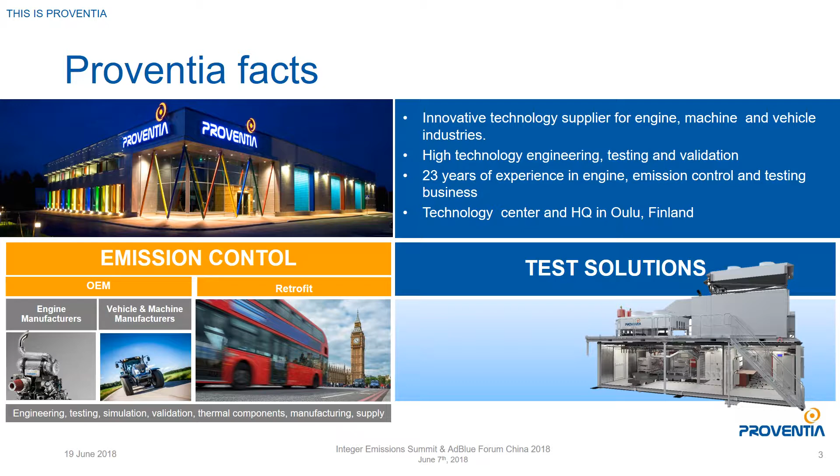Emission control as one slide could look like this. We do engineering services, we design, we develop complete systems. Sometimes we select the components, catalysts, dosing systems - everything can be selected either by us or by our OEM customers, or in combination. We make the design based on the space claim, back pressure targets, and all this stuff.

Typically, a lot of simulations are needed - CFD and FEA type simulations we do on a daily basis in-house. What we have developed and designed, we test and validate through engine testing, performance testing, aging and durability testing, and typical mechanical challenges or issues will be verified as well on shaker units, corrosion testing, or you name it. As a result, we have this tailored or tailor-made system for each application.

Having said this, of course the target is to find as universal a solution as possible to be a key part of the engine itself. That's the trend today, that it's a sole component of the engine. So whether it's a forklift, telehandler, water pump, tractor, or harvester, more and more our customers are targeting having the same kind of unit or components across all applications, if that's possible.

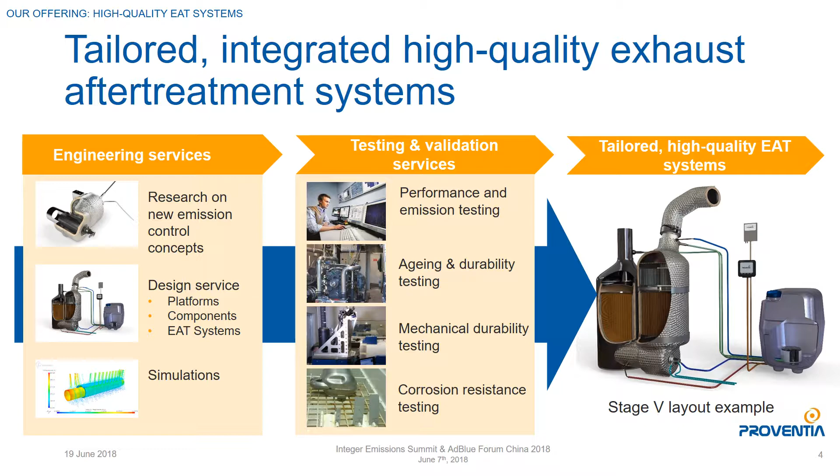For our testing, we have engine cells, 4 dynos for testing up to 470 kilowatts. What we do: the customer sends the engine to us, we make the basic concept development, catalyst screening, dosing parameter development. We do a lot of aging studies or durability studies, and we can run unmanned with our aging - 24 hours, 7 days, with remote control in our dynos, which makes us fast and cost efficient in developing.

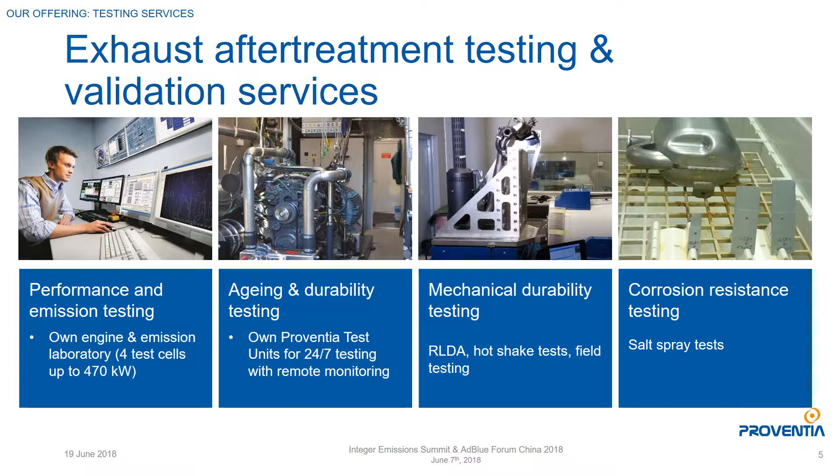For the test solutions, the picture on the right is actually from our backyard. We realized that we need more capacity because more and more projects were coming in, and we didn't have space indoor. So we developed a container-based test solution for our own purposes first.

But then our customers, or people visiting us, started to be so curious about these, and they started to ask, can you sell these? And yes, today we sell these, and it's really a business for us to develop and design test units for engines, powertrains, or electric components like batteries, for example. It's really modular and transportable - you can use it today in China, next year in Brazil. It takes only 2 containers to deliver, then 3 weeks of installation, and it works again, roughly speaking.

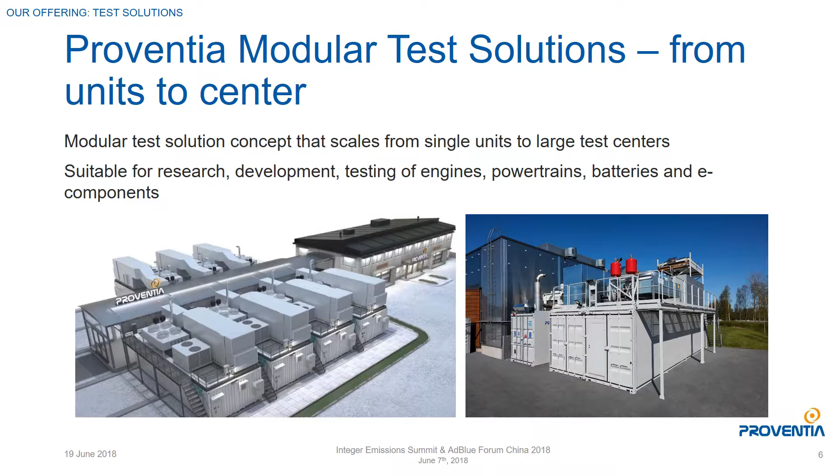Now we go for after treatments or emission control challenges and development drivers. There's more and more focus on real world conditions. We heard good examples from the PEMS challenges and telematics during the days. So what are the requirements in the future to really control that vehicles are as clean as they claim to be? Thanks to certain OEMs a couple of years ago, emission control companies are happy to develop things further because there's a lot more control to come. Real world efficiency and high demand for efficiencies are there over wide temperature areas, over different types of applications in non-road machinery.

We saw rather nice pictures by John Deere in the previous speech. What kind of applications do we really have? It can be a harvester machine. We are from North Finland, minus 40 degrees in winter time. SCR needs to work, DPF needs to be regenerated at minus 40 degrees ambient temperature. The same engine can be used in a vineyard tractor somewhere in South Italy, for example, plus 40 degrees. Same system, same engine, same catalysts, same dosing control systems and everything.

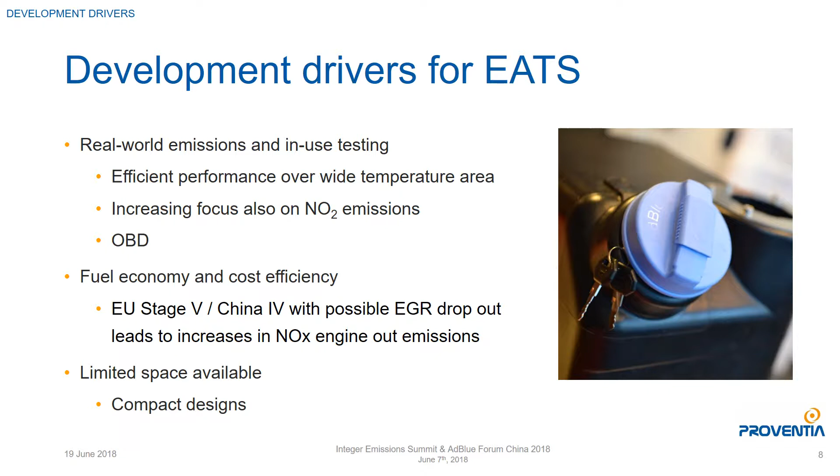Wide operation window from full load condition to low load conditions, different mass flows, different temperatures, and different NOx emissions, different dosing parameters. High NOx means a lot of dosing there to avoid ammonia slip. And you cannot get any wall wetting, so you need to take care of the design so you are not causing any kind of issues with the low temperature conditions.

High NOx reduction targets, legislation is tighter and tighter, so more urea needs to be injected because engines are still emitting NOx - we heard up to 9 grams per kilowatt hour. It's quite typical without EGR. You need to meet emission regulation with that kind of raw emissions. And whatever we dose, of course, the catalyst needs to do its work, so we need to make the design so that all the ammonia molecules will be utilized for the reactions.

And all this under the bonnet in the tractor, or very space constrained applications, which causes certain challenges on wall wetting and deposit issues. One needs to have good mixing devices, good design. As an example...

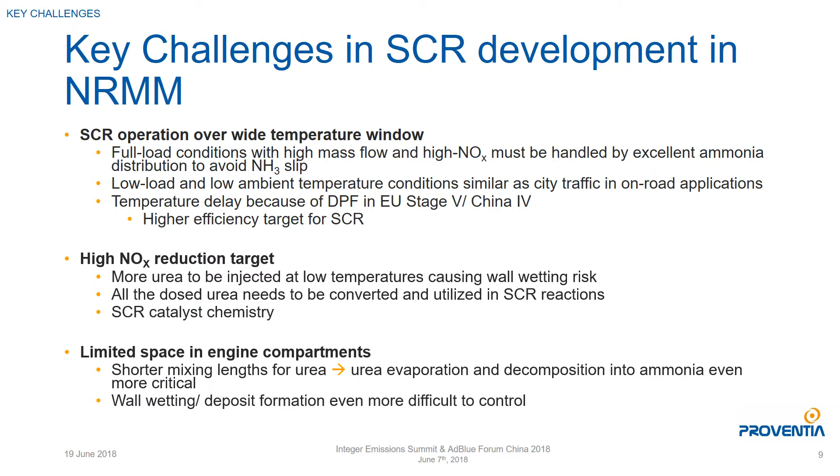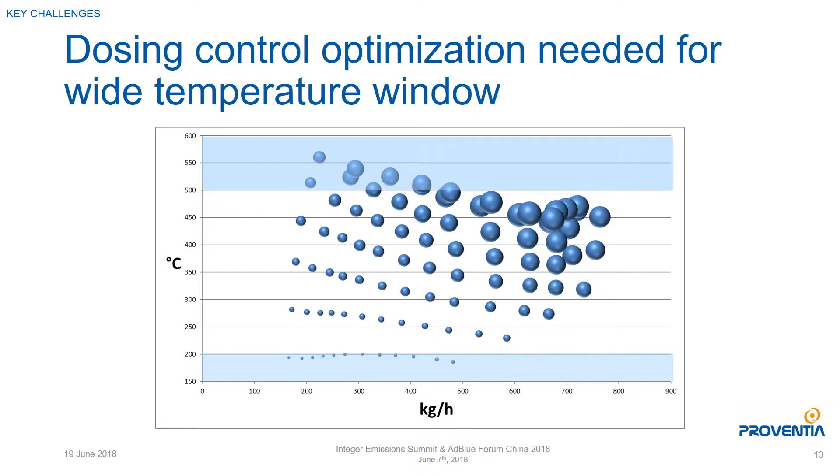A dosing map from one of our OEM customers, showing different temperatures from 550, 560 degrees Celsius down to 180 degrees Celsius in dosing. So we start to dose at 180, and the highest temperature we dose at is 560, 570 in some cases actually. Still the same system, no wall wetting allowed, of course. Mass flow point of view: high mass flows, high dosing rates; low mass flow, low dosing rates. You need to mix, you need to have good uniformity before the catalyst for the ammonia.

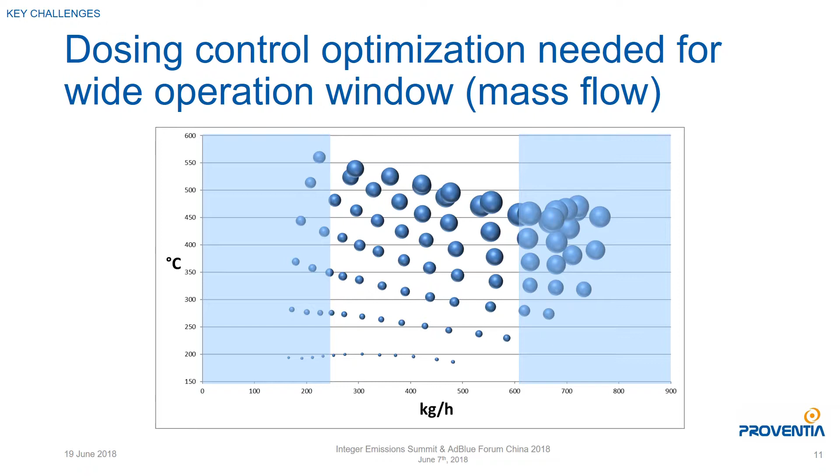That's the playground, or that's the field we are working in. Now we have some slides on our tools, how we tackle these challenges, what are our solutions, or what is our competence to solve these issues.

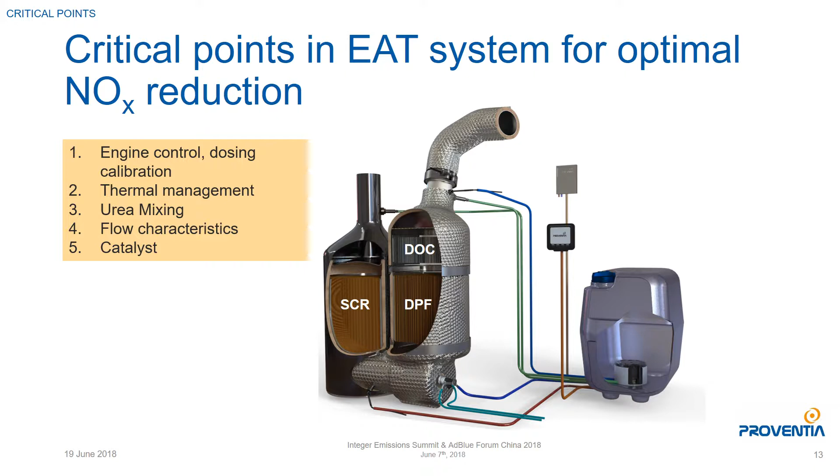Engine dosing calibration is typically done by the OEM. So our scope is mainly on insulation and thermal management, to make sure there's enough temperature inside for the reactions, to make sure there are no local hotspots, but also on the other hand no local cold points where the reactant is concentrated. Design and mixing is key hardware for the system, of course. And then catalysts - in DOC, DPF, SCR, all the catalysts are of course playing the key role.

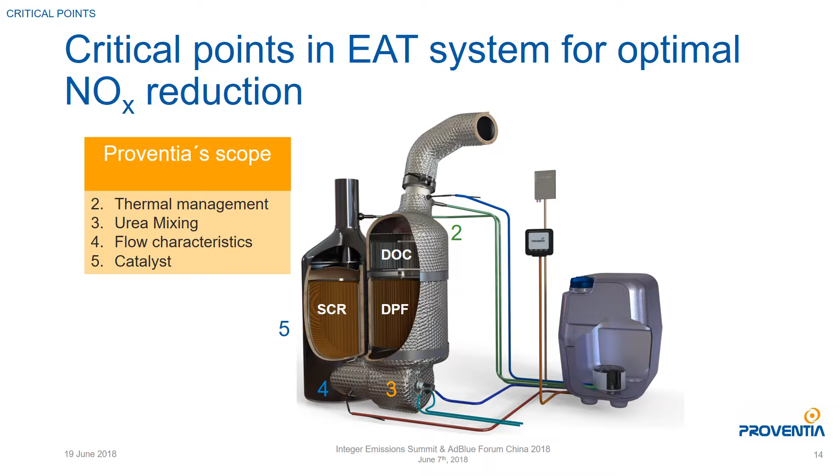Insulation - we have integrated insulation in all our after treatment systems. It can be around the whole package, or partially insulated on the challenging areas. Insulation can be used for exhaust ports even. So it's a multi-layer integrated insulation allowing tighter space - we don't need jackets for insulation. This is very good from a space claim point of view, keeping the temperature inside, helping the reactions, of course.

SCR performance - we have higher efficiency when we have higher exhaust gas temperatures, meaning also better fuel economy when we have enough temperature without any engine measures. And especially in non-road machinery, skin temperature challenges are there, and the tighter the space, the more sensitive components are around the after treatment systems - some kind of connectors, wire harnesses, or sensors. So we need to take care of the skin temperature, and also from a safety point of view, you have areas where people are working all the time around the engines, and we need to make life safe also for them.

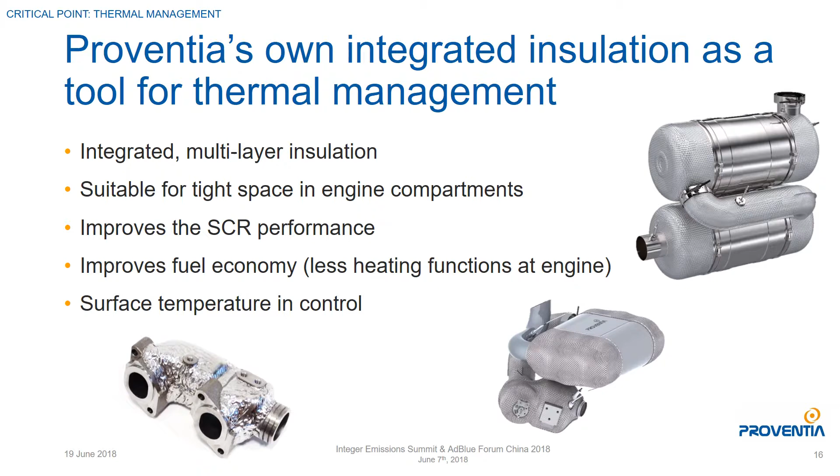As an example of insulation, roughly speaking, a 1 meter pipe, 90 millimeter in diameter, without any insulation, you lose roughly 14 degrees per meter, starting from 319 degrees down. With rather thin insulation already, 12 or 30 millimeter insulation, glass fiber between the foils or corrugated foils, we easily get a 60 to 70% lower thermal loss. So we really can help catalyst function with rather simple thin insulation.

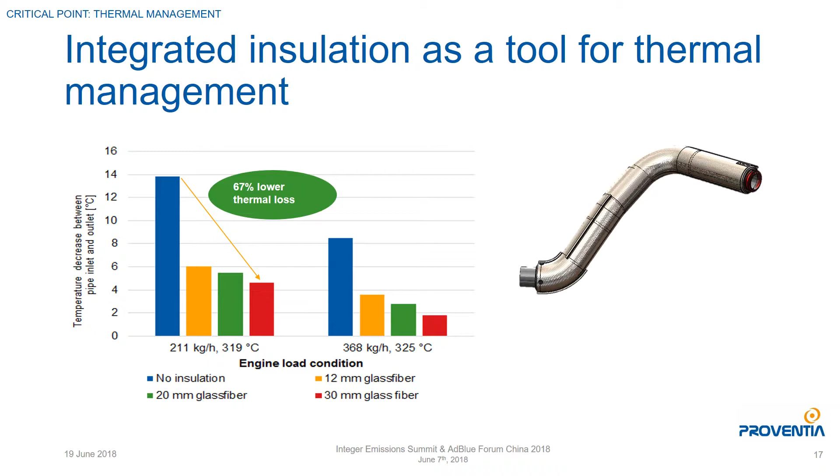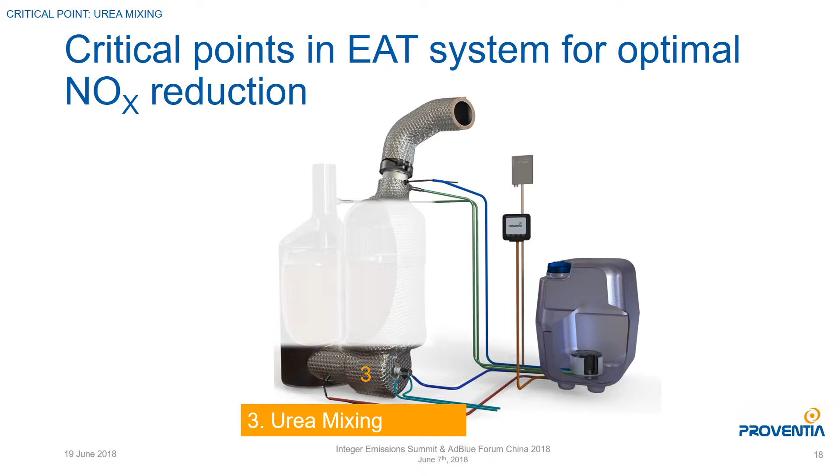Mixing, whatever you inject there as AdBlue, you want to get the ammonia out from that AdBlue, so you want good mixing and good evaporation rates. For that purpose we have developed our own swirling mixer, patented of course. It allows a shorter distance from injector than any other mixer type, so from injector to catalyst we make sure evaporation happens extremely fast. Mixing is happening nicely, and uniformity before catalyst is 0.98, 0.99 level in typical applications. For example, in Stage 5, say a 7 liter engine, from injector to SCR inlet the distance is roughly 30 to 40 centimeters only. This is already in market in Stage 4, so it's already proven to work.

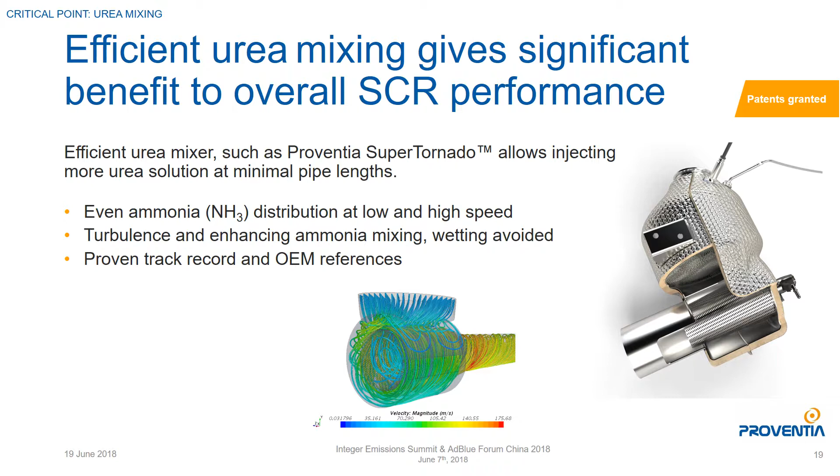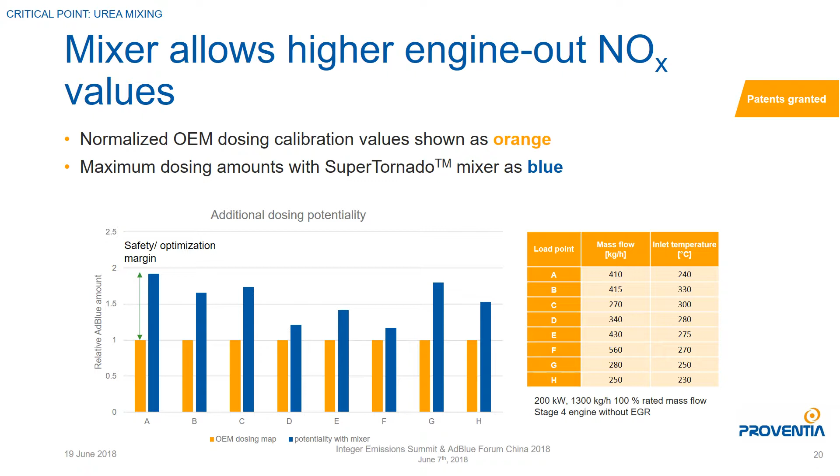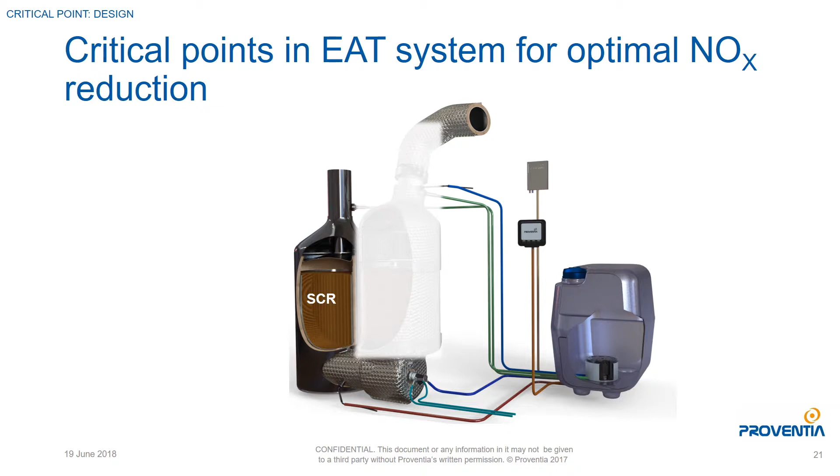What happens after the mixer is of course important as well. We simulate a lot of uniformity before SCR. We design so that the selected catalyst can do its job, meaning all the molecules meet the catalyst surface equally or uniformly. Ammonia uniformity needs to be at a high level to meet the high demands for SCR efficiency. So a lot of simulation, CFD simulation with urea droplets - we never simulate with water. We always use urea because there are key differences in evaporation, kinetics, and mixing characteristics due to chemistry.

We measure all the designs experimentally. So we simulate, but we also measure. We have developed our own measurement devices for NOx outlet scanning. We estimate, or have an approximation, that when ammonia goes into the catalyst, it reacts over that channel distance or length, and there's no NOx coming out.

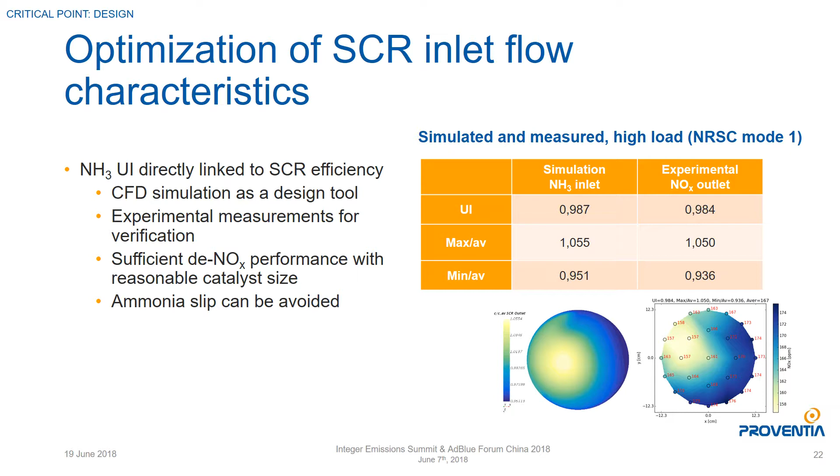Sensoring is also very crucial when it comes to OBD and real-world compliance and PEMS type things. When the design is made and the OBD will be in place, nobody wants to get OBD lights without any real reason. That's why it's very important to find the right place for the NOx sensor if the OBD is based on the NOx outlet sensor, for example. We do a lot of development on this part as well - it's not enough to make a nice flange-to-flange scanning, but what happens after, where to place the NOx sensor for OBD or dosing control or whatever reasons. In retrofit we use NOx outlets also for dosing control parameters. We do this in every single project more or less, and sometimes a surprisingly big amount of development is needed to make the final product really work with the pipe designs.

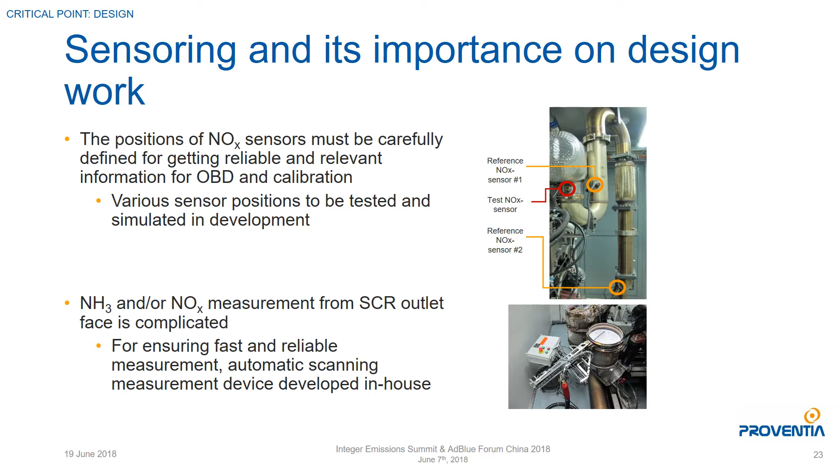Catalysts are in after-treatment systems naturally, so substrates need to be selected correctly - right size, right type of cell density, right back pressure behavior, robustness, especially for the DPFs, robustness against soot loading or ash accumulation and so on. From a regeneration point of view, they need to be durable enough. It's always a trade-off between back pressure and performance.

And coating, we have heard fuel qualities and lube oil qualities a lot during these days. What kind of fuel is used, what kind of lubricant consumption there is, that always affects the coating selection. And as an integrator, we need to know the catalysts that will be used. We need to make the design based on those facts as well. Ammonia adsorption and so on - we need to know these.

The target, of course, is to get the fast SCR reaction - to utilize the molecules in the optimized way, which means the DOC is playing a role also for the SCR reactions. If you poison your DOC by sulfur, you destroy your SCR at the same time. You need a certain amount of NO2 for SCR reactions. If the DOC doesn't function anymore due to sulfur poisoning, then the SCR cannot do its work.

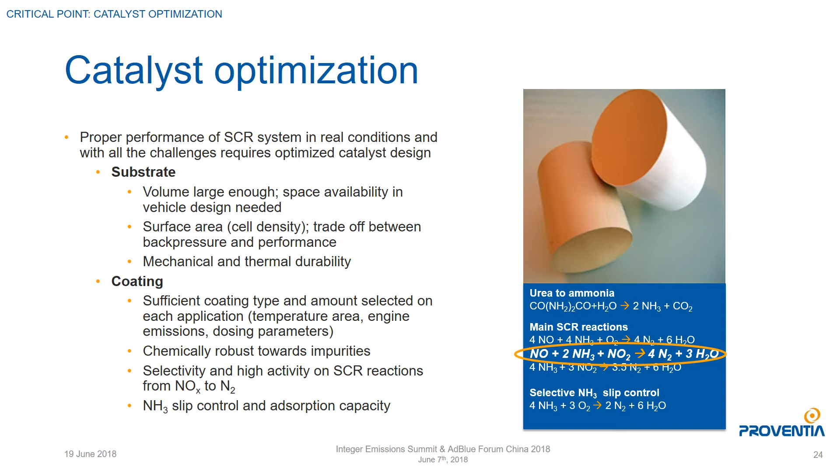One example of how we see now Stage 5 in fast-running programs or China 4. We are hearing now the deadlines or very limited time for the development for China 4. One approach could be a standardized system, part of the engine - it could be inline, one box solution, this kind of system, everything in one package.

It can be outside of the engine compartment, but quite many of the applications we are working on now for Stage 5 will have this kind of design on top of the engine or on the side of the engine, integrated into the engine design. If your engine is going into a water pump, forklift, crane, small crane, or excavator, it's always the same design with the aftertreatment, always with the same components inside.

So clearly lower time and money for the development. You develop practically only one robust system which can be used for many applications. This is the approach we are now proposing for quite many OEMs today, and this is something we are already in development for with quite many OEMs in Europe. More or less, this could be brought from Stage 5 development to China 4 development quite easily, and that's something we are now focusing on.

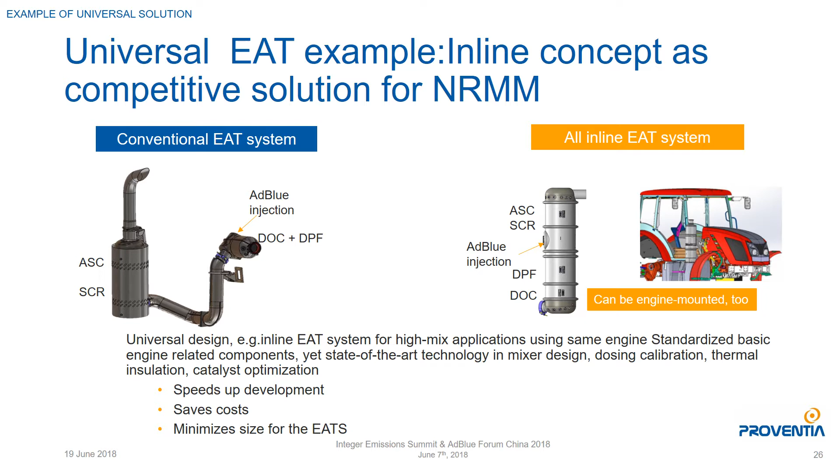Roughly speaking, the size for a 100 kilowatt engine - we are speaking about 1 meter long, 25-26 diameter, depending on the substrate diameters. So one package on top of the engine or on the side of the engine. If you find this kind of space claim near the engine, that's the design we do.

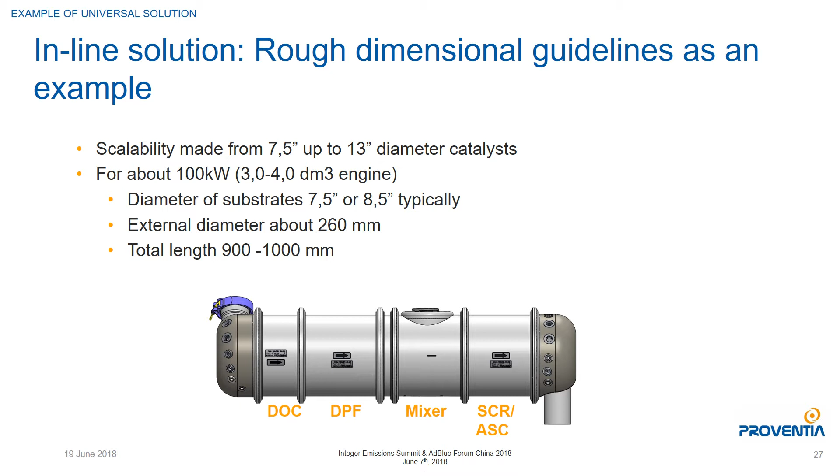Mixer is of course crucial in this kind of design too, with very short distance from the injector, and that's a key element or key competence we have in this system. It can be axial, radial, inlet, outlet - different variables.

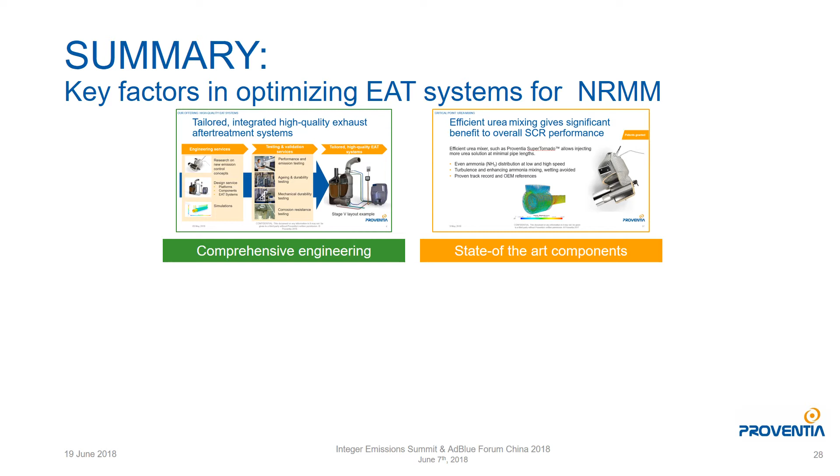Going to the summary - which are the key factors in optimizing the systems? You need to know how to design, how to make the development, a lot of engineering. You need to select the right components - mixers, catalysts, dosing systems. When you have selected the components, make the right design, keeping all these facts in mind.

At the end, it can be a short track or fast track solution, or a simplified solution if needed, or if time flies too fast. Contact us, come to our booth - we can show how fast we can be in development.

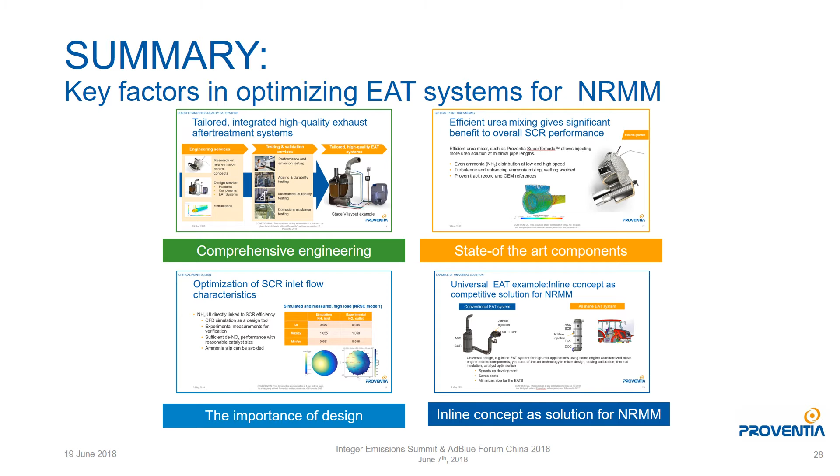Key message: Proventia has verified solutions. We have been in the market since Stage 3 on non-road mobile machinery OEM. We have knowledge, we have wide experience - if not all the challenges, but quite many challenges we have seen together with OEM customers. We have long-term customer relationships. We still have all the customers we started with at Stage 3A - all of them are our customers today.

We are quite flexible in component selection. We work with quite many dosing companies, dosing system companies. Injectors can be selected by us or by the OEM, and the same is valid for the catalysts, substrates, and coatings. Either we select or the customer selects - that depends case by case.

And then a universal inline system could be the approach, could be the solution for a standard system for coming needs. We are not one of the biggest companies, but we are one of the most flexible and agile, so we find the right partners for all the parts we are not doing by ourselves. We do manufacture - we are a tier 1 supplier - but we also license our development work to companies which the OEM prefers to use, and we localize when it's time to go there.